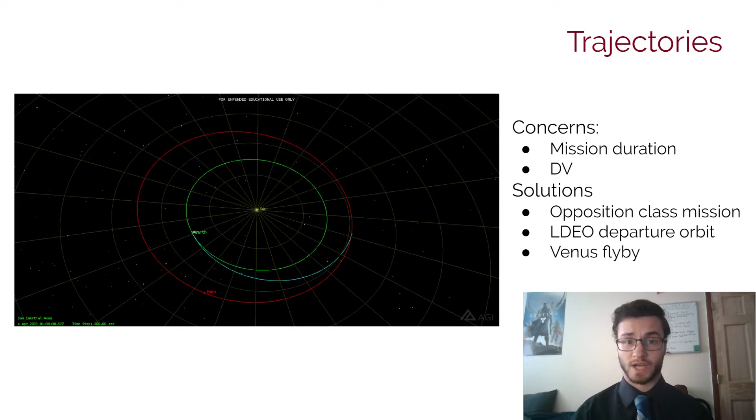A 2033 transfer window was chosen as it holds the lowest energy trajectories to Mars from opportunities in the late 2020s to the mid-2030s. The second lowest energy transfer in this window also holds the lowest time of flight, making it the ideal departure date to satisfy our requirements. An opposition-class mission with this departure trajectory has a total mission duration of about 563 days, a massive improvement upon a conjunction-class mission, which usually has a total mission duration of about 1,000 days. Additionally, a similar opposition trajectory is also possible in 2035, allowing the use of 2035 as a backup launch date in case of schedule slip.

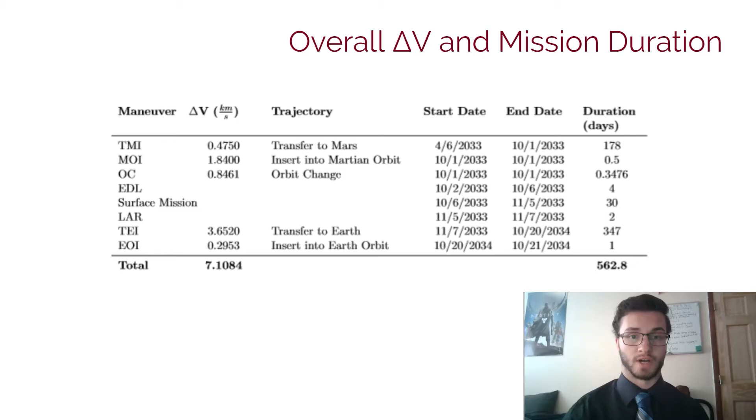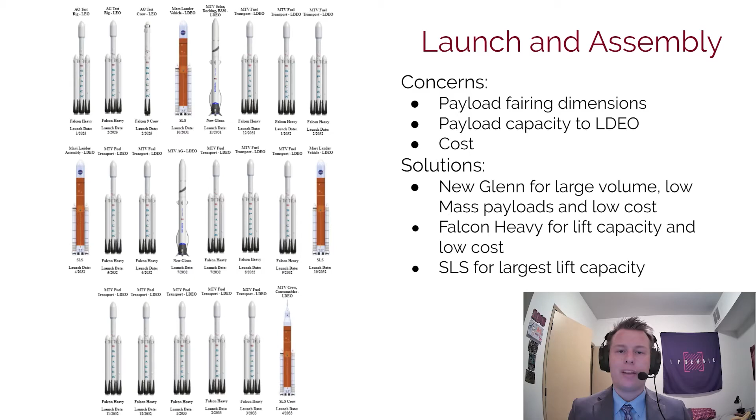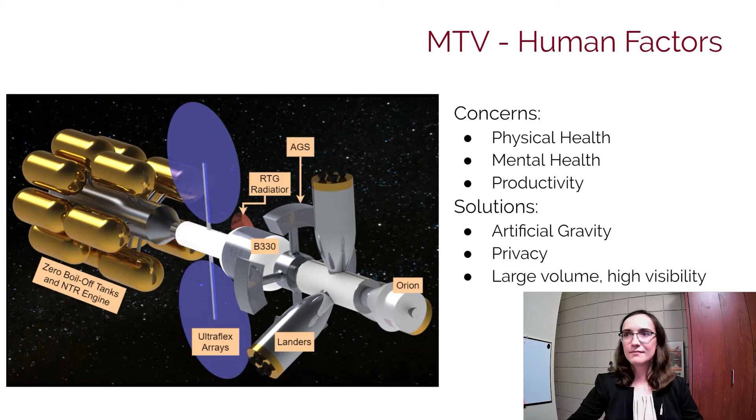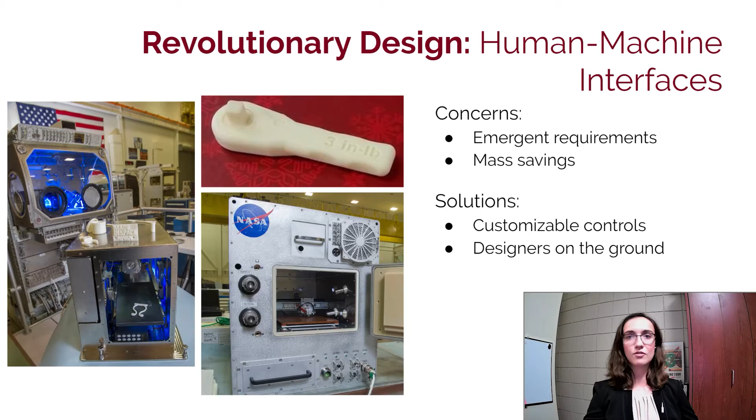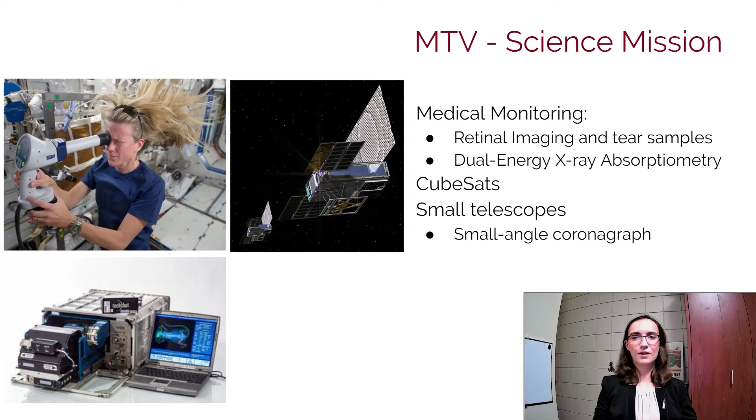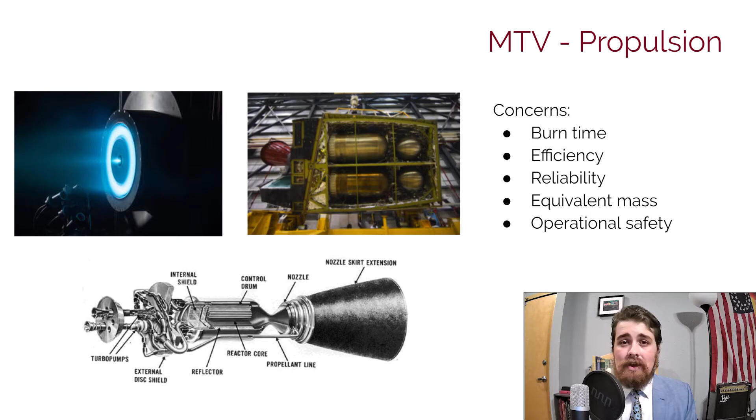In designing a propulsion system for the MTV, a few major factors were considered: burn time for our required maneuvers, engine efficiency and reliability, overall system equivalent mass, and operational safety. Four different configurations were considered: a pure ion electric system, a pure chemical system, a hybrid of chemical systems and ion electric systems, and nuclear thermal propulsion. We chose nuclear thermal propulsion.

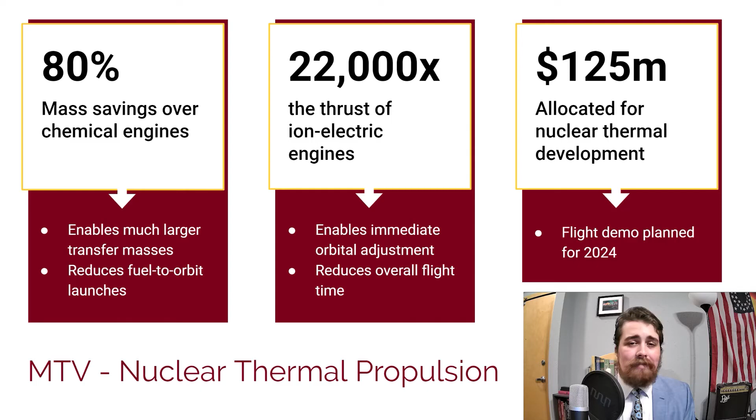Additionally, the new congressional funding and plans for aggressive flight testing by 2024 or soon thereafter gave us a lot of promise that this technology, which has long been touted as a lost wonder of the world, would actually come into fruition in our time. Characteristics for our nuclear thermal engine were pulled from a recent NASA paper, which proposed a NERVA-derived, more flight-adapted design.

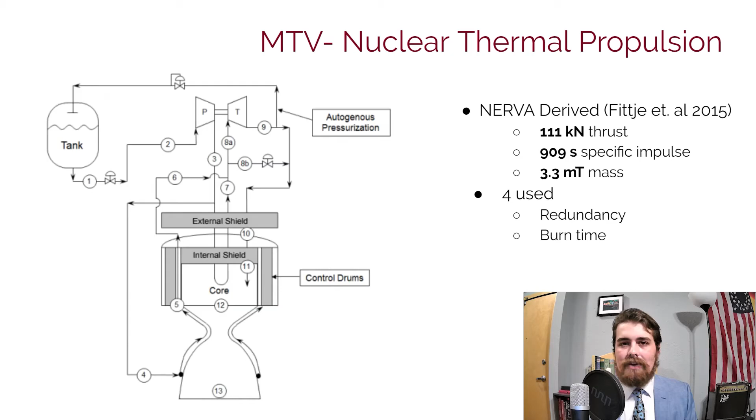It provides 111 kilonewtons of thrust, is rated for 10 hours of burn time, and in our design we chose 4 of these, which would be mounted at the rear of the vehicle for a few reasons. Number 1, just raw redundancy, the more the better. Additionally, the 4 engines allow for a very powerful 444 kilonewtons of thrust, which will allow us to accomplish very quick, short maneuvers, increasing our overall efficiency. And they can also be burned in engine pairs, reducing wear on actuator components and allowing us to extend the overall lifetime of these engines.

NASA Standard 3001 requires that muscular strength and bone mineral density must be maintained above 80% of baseline values. This is a difficult requirement to meet for current ISS astronauts who spend 2.5 hours every day exercising but still exhibit significant deterioration. Reduction in muscular strength, loss of bone mineral density, and increased orthostatic intolerance may lead to difficulty performing their required tasks. Artificial gravity will be necessary to address this risk, but there are still many unknowns.

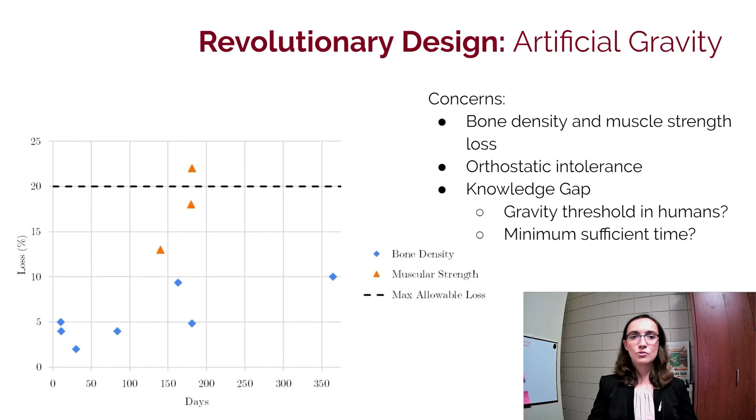There is no data to suggest what level of partial gravity or what duration spent in partial gravity will be sufficient to mitigate deterioration. Rodent studies suggest that there is a minimum efficient gravity level between 0 and 1 g, but this level is unknown. Furthering this research will help define the gravity effectiveness threshold, and longitudinal studies of this crew will provide much needed data. Let's talk about the artificial gravity concept.

We've got a couple of requirements that define this design. We're looking at less than 25% gravity gradient across the body, which means, for example, if there's 1 g at the feet, there has to be at least 0.75 g at the head. We're talking about the astronauts here. We're also looking at fewer than 23 revolutions per minute, and this is a disorientation limit, as above 23 RPM it is challenging for astronauts to adjust to that revolution rate.

So we've designed an artificial gravity concept that has a radius of 7.78 meters, therefore an intermediate radius centrifuge, with 0.4 g at the head of the tallest astronaut at 6 feet 4 inches. This results in an acceleration of 0.533 g at the feet to satisfy the 25% gravity gradient. This centrifuge is spinning at 2.51 revolutions per minute.

Now, a couple of notable things about this design is that it is designed to be an oblate spinner, which means that the axis of the main cylinder is the axis about which this design is symmetric. So we have coined that the IX axis. So the IY and IZ axes of inertia have the same magnitude. This should result in a very small control input to maintain attitude during transit of the MTV.

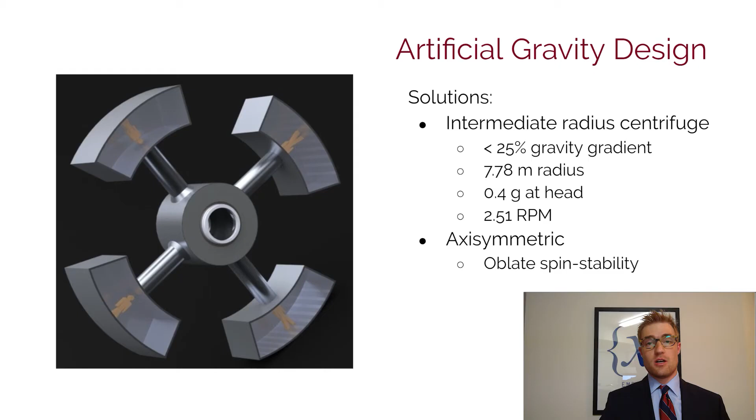The hyperbolic excess velocity at Mars for our ballistic transfer is nearly 4 kilometers per second. In order to minimize the capture delta V, we first insert into a polar, highly eccentric 100 kilometer by 13,000 kilometer orbit. The non-human landers then undock from the MTV and re-enter over 2 orbital periods at periapse.

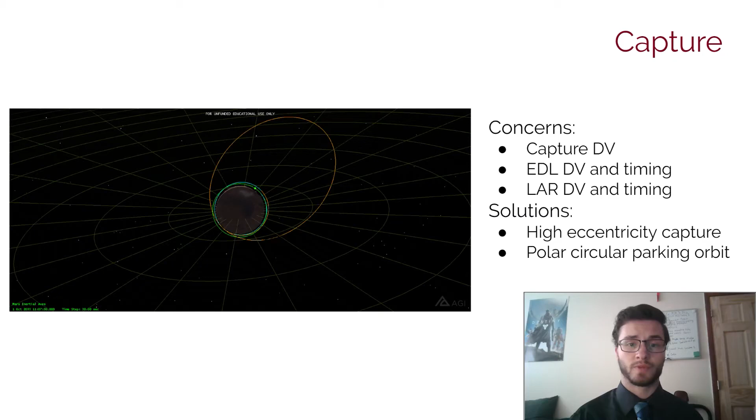The MTV, along with the human lander, uses the drag of the Martian atmosphere, along with 2 burns at periapsis and apoapsis, to shift to a 300 kilometer circular parking orbit. This orbit is more operationally ideal for the mission, as it allows 2 predictable launch, ascent, and rendezvous opportunities per Sol. Finally, the 3rd human lander will undock with the 2 astronauts aboard and descend into position for EDL.

Over the course of 3 days, each lander will descend from a polar orbit to Jezero Crater. The first will be Obsidian, containing the Mars Ascent Vehicle. The second, Onyx, containing our habitat, science equipment, and power infrastructure. And the third, Opal, containing the rover, construction equipment, and the crew itself. These landers will all utilize HIAD technology and subsonic retropropulsion to land within a 15-kilometer landing ellipse on the surface of Mars.

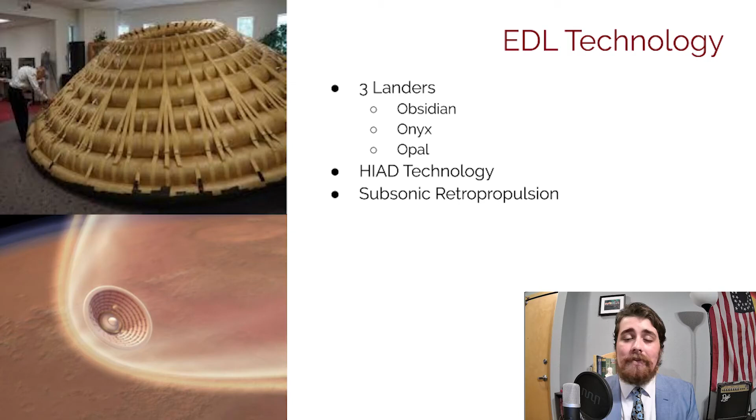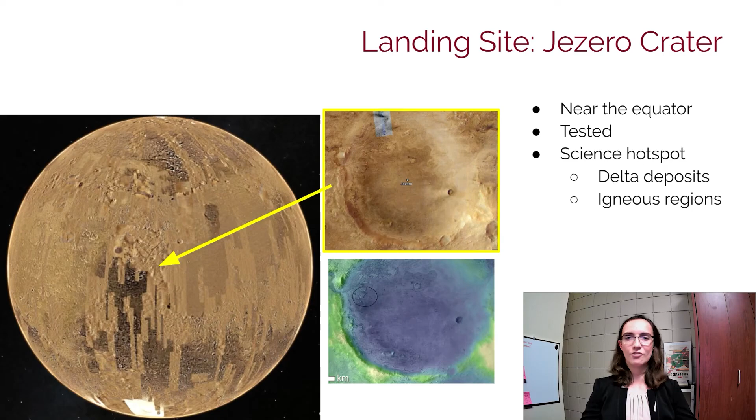Surface operations. Jezero Crater is an ideal landing site because it's near the equator to get adequate sunlight. It will be scouted in advance by Perseverance, and it's a science hotspot. The delta deposits in the northwest region may have preserved organic molecules, making it the perfect spot to search for life. Jezero's igneous regions can also help answer questions about the crater's volcanic and fluvial time histories.

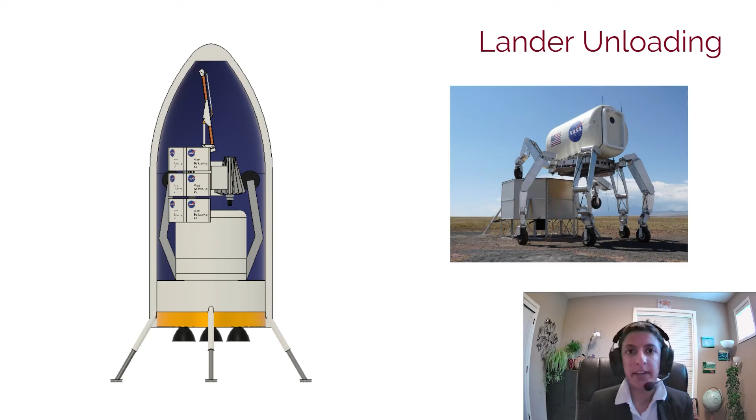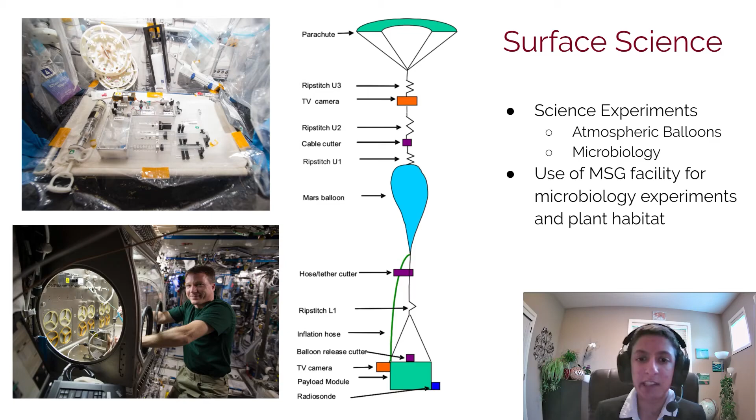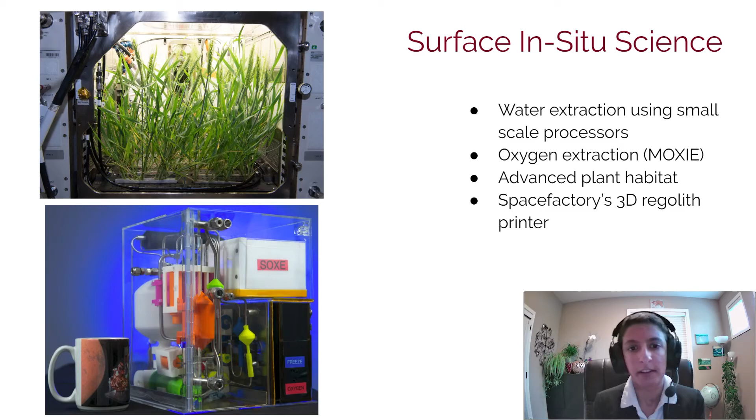Science experiments on the Martian surface will include launching atmospheric balloons to learn more about Martian weather and climate, and microbiology experiments where Earth-born microorganisms and a microgravity glove box will be assessed for how they react to the Martian environment. In situ science experiments will include water extraction from the Martian atmosphere, oxygen acquisition based on the MOXIE program on the Perseverance rover, an advanced plant habitat that will provide a small food source and biomass production, and 3D printing using Martian regolith.

Sample collection will include short-term samples, which will be mainly used to determine whether a sampling site is of scientific interest, and then where to sample next. Long-term sample acquisition will focus on total diversity and total mass of samples. All long-term samples that head back to Earth will be sterilized before they leave the Martian surface, so all analysis on non-sterile samples will be done in the Shed Lab on Mars.

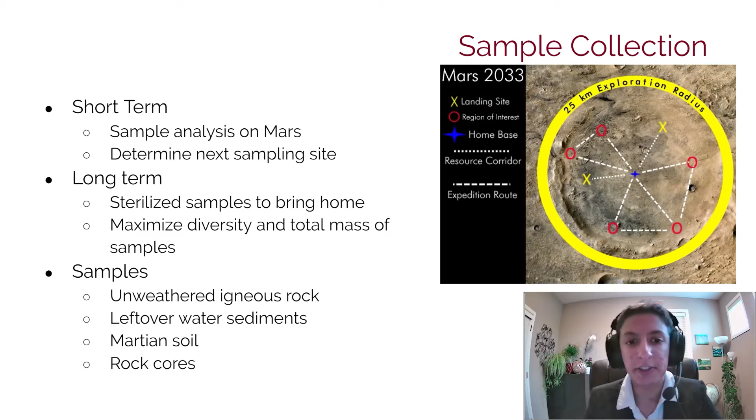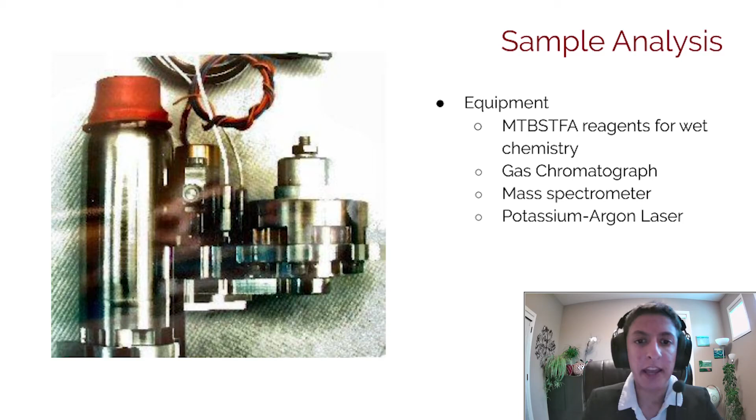Derived from NASA's current science mission priorities, Project Sisyphus will engage in 3 major areas of study. Number 1, the search for life. Number 2, characterizing the Martian environment. Number 3, demonstrating ISRU technologies. In order to maximize the value of time on the surface, sample collection will be divided towards 2 main priorities: in situ science, which will allow us to look at unsterilized samples and inform collection efforts while still on the surface, and at-home science, which will allow us to further overall scientific understanding and plan for future missions.

In designing a habitat for the Martian surface, several different factors were considered, primarily stowed volume, ease of deployment, and habitability of the actual space. In order to overcome these issues, we developed the Buildable Nested Deployable Temporary Habitat, or BuNDTHab for short. The BuNDTHab is an inflatable habitat derived from Bigelow Aerospace's inflatable technologies. It features a semi-toroidal outer body wrapped around a central hard core, which contains all of our hardware, equipment, and hard points. It features a hybrid suit port dock to reduce contaminants potentially leaking into the habitable space,

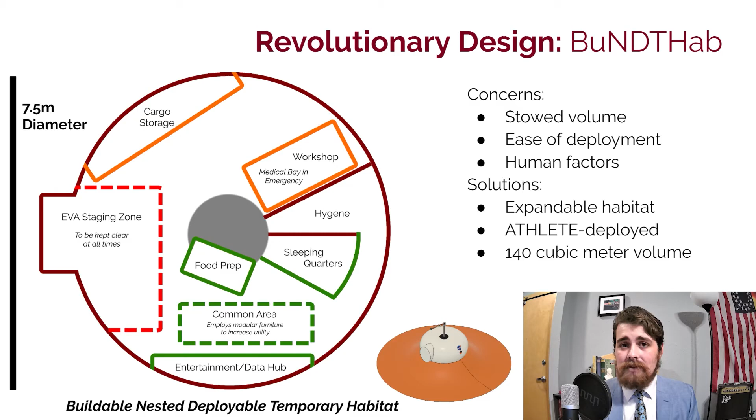and it is deployed off the lander using an ATHLETE-derived rover. This ATHLETE rover will step off of the lander, seat itself in an area that's been carved out by the bucket of the off-Earth tracked rover, and then be buried by the rover, providing a rigid, stiff, strong support base for the habitat once it's actually on the surface.

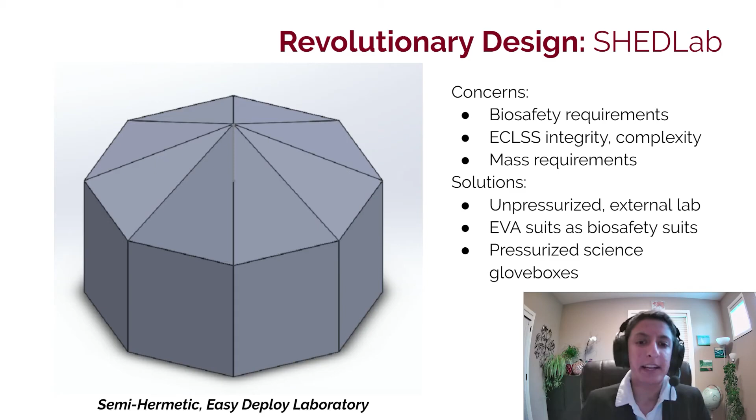The Shed Lab was mainly designed out of biosafety requirements. It acts as a separate module from the BuNDTHab and is an unpressurized area protected from the Martian environment to perform experiments. Astronauts will wear their EVA suits inside the lab, with the suits acting as biosafety suits. Experiments that include biological material from Earth, like the microbiology experiments in the plant habitat, will be conducted in pressurized science glove boxes. Let's talk about the Off-Earth Tracked Rover, or OTTR for short.

This is Project Sisyphus's design submission to fulfill the requirement that the astronauts need a pressurized rover on the surface of Mars to aid in the search for life. It comes equipped with a number of tools to do so, in addition to helping assemble the BuNDTHab and the SHEDLab, moving radioisotope thermoelectric generators, and collecting samples.

We were seeking a very robust design for this OTTR to cut down on the amount of maintenance that the astronauts were required to perform, and so we chose a tracked drive train. This was seen as very durable and resistant to failure on the terrain types that we were expecting. Additionally, we were shooting for a 30-mile-an-hour top speed, which is about 13.4 meters per second. We saw this as a good balance of both safety and speed when traveling around Jezero Crater.

A tracked rover design is unique to the Sisyphus mission. Tracks were selected over traditional wheels for their remarkably high traction, considerable maneuverability, and robustness to terrain. The OTTR is inspired by vehicles like PowerTrax's PT-8 snowplow and the Army's multi-purpose vehicle, which have a high payload capacity and can drive off-road in rugged conditions. Tracks distribute the maximum load over a greater area than wheels, allowing the OTTR to carry more than 11 tons reliably over the surface of Mars.

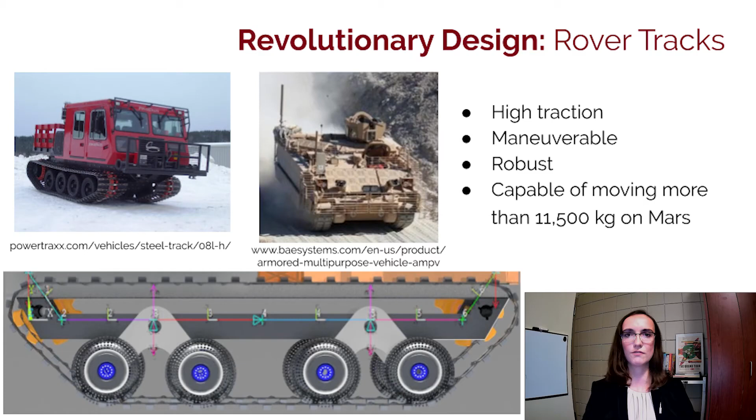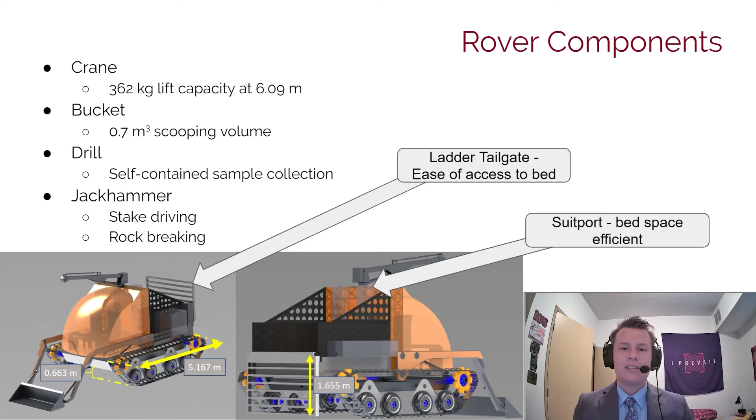To increase the usability of the rover, several attachments will be used. A crane will be used to move large equipment in and out of the bed. A bucket will be used for the clearing and transportation of regolith. A drill will be used for scientific purposes, and a hammer will be used to drive in stakes for the habitat as well as to break up regolith. A ladder will provide easy access to the bed for the astronauts, and suit ports will be located in the bed.

The primary concerns for design of the surface power architecture include total mission energy, peak power demands, surface power mass, solar panel efficiency, and operation in the case of unit failure. To meet peak power and mission energy requirements, 10 kilowatt radioisotope thermoelectric generators called kilopower units are employed. These RTGs achieve their high power output through the use of high efficiency Stirling engines and can deliver more power per kilogram to the surface than a large 40 kilowatt fission power unit.

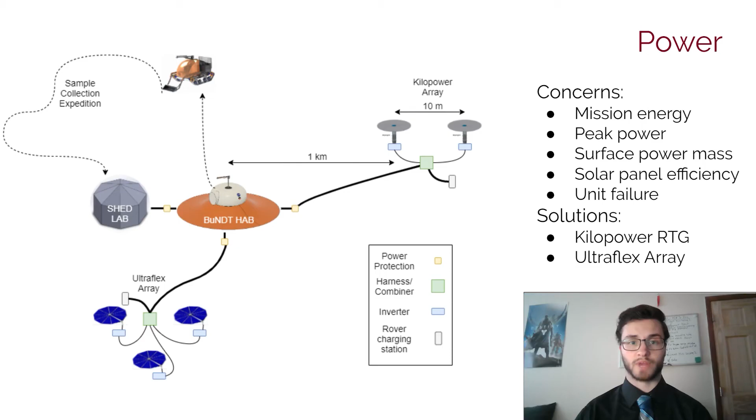To further reduce mass, 7 kilowatt UltraFlex solar arrays built by Northrop Grumman are used to supplement the number of RTGs needed on the surface. It was found that a combination of 2 kilopower units and 3 UltraFlex arrays were able to meet both mission energy and peak power requirements. To ensure reliability, the same VAC cables and power inverters are used for both the UltraFlex arrays and kilopower units, since they're in roughly the same power range.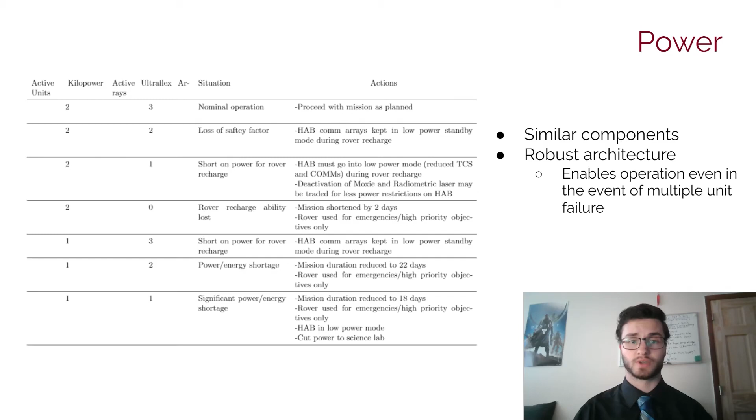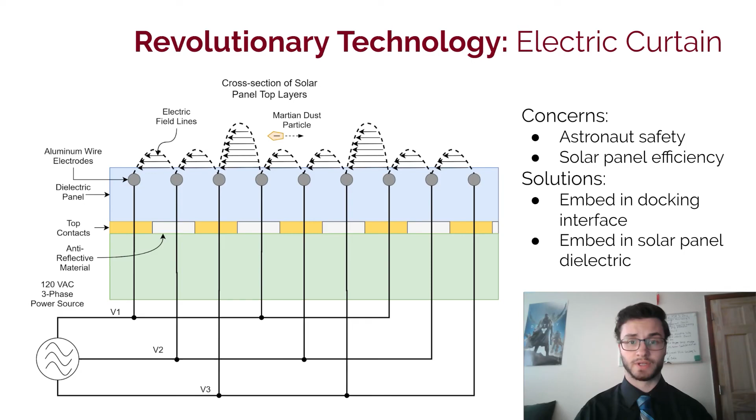One concern not addressed in the previous power slides is how the efficiency of the UltraFlex solar arrays will be maintained in the presence of charged dust particles. These charged dust particles also pose a threat to astronauts as they contain perchlorates and can stick to their suits, making their way into the habitat through the docking interface. To solve this, Project Sisyphus employs the use of an electric curtain. This device uses wire electrodes along with a multi-phase voltage source to levitate dust particles off of surfaces and carry them away with a traveling electric force wave. The device uses simple components, requires relatively low automation, and the electrodes can be easily planted in any dielectric.

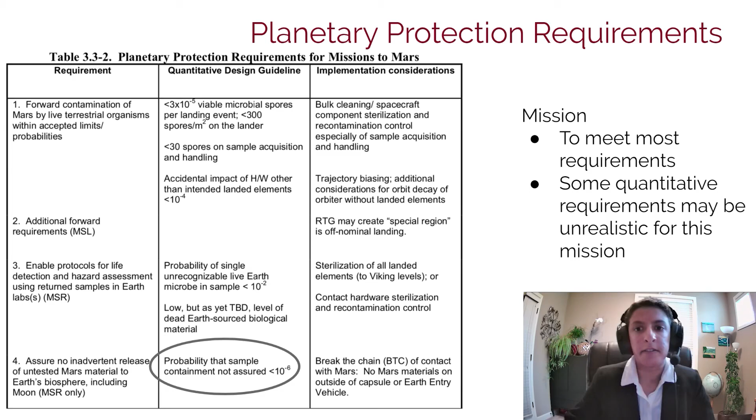Our planetary protection plan is split into two categories: forward and backward contamination prevention. Forward contamination prevention starts with biobarriers being installed on the exterior surfaces of the MTV and landers. HEPA filters will also be installed in the pressurized habitat to prevent contaminated air leakage. Before launch from Earth, the MTV and landers will be sterilized via dry heat microbial reduction.

As an added precaution, vapor hydrogen peroxide will be used to sterilize the inside of the habitat before astronauts leave the Martian surface to ensure that air leakage won't contain Earth contaminants when they leave. Backward contamination prevention starts with containing Martian samples with in situ containers for analysis in the shed lab. Before ascent from Mars, all samples will be sterilized and contained via brazing.

The ascent vehicle which contains the samples will likely be free of Martian biological contaminants due to solar wind and microgravity. Finally, an Earth entry vehicle will be used to capture the ascent vehicle before it enters Earth's biosphere, ensuring we break the chain of contact with Martian material.

The main goal of the ascent vehicle was to limit system complexity while safely getting the astronauts to the Martian transfer vehicle. To limit system complexity, all of the ascent vehicle will fit within a single lander. This means that the fuel and structural mass must be below 22 tons. To limit fuel mass, a single vacuum-optimized Raptor engine in a single stage-to-orbit configuration will be used, giving a fuel mass of about 18 tons.

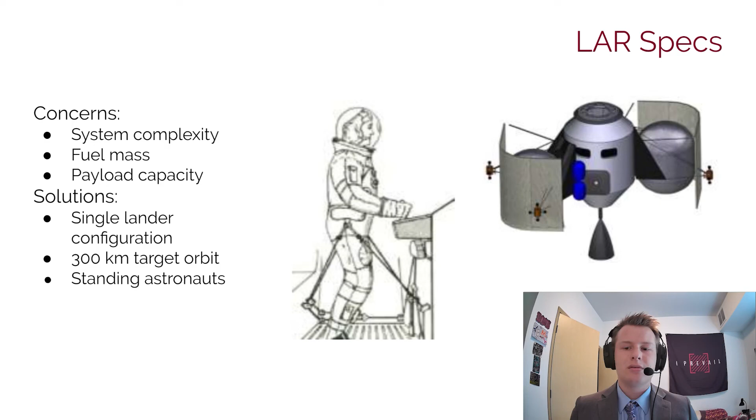Because science is of great importance to this mission, the structural mass was also limited. To do this, the astronauts will stand during ascent, much like the Apollo missions. This allows for sample return of about 600 kilograms. Validation of the MAV's ability to reach the MTV's 300-kilometer parking orbit was undertaken by applying first principles to obtain an overestimate of the fuel mass necessary to reach this orbit. These results were confirmed using a launch segment simulation in Astrogator.

The conservative estimate was made using a modified version of the Tsiolkovsky rocket equation that included a term for constant gravity. It was determined that assuming alignment of the gravity vector in the opposite direction of the thrust vector for the entirety of the burn time would yield an overestimate of the fuel mass required.

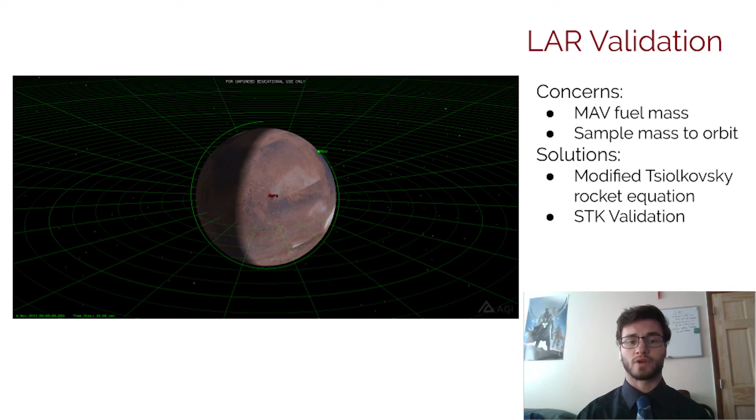The results of this calculation showed that our initial estimate of 18,000 kilograms of fuel mass was roughly 1,500 kilograms more fuel than was needed to reach the desired orbit, for a sample payload of 600 kilograms. Instead of increasing the sample payload, it was determined to keep the safety factor on fuel mass, ensuring that plenty of fuel would be available for orbit phasing and additional rendezvous maneuvers.

Budget and risk. The first step in estimating the cost of Project Sisyphus was to compute the NASA budget from 2021 to 2035. This was done using the 2020 Explore budget estimates and was found to be about $84 billion. The Apollo missions were then used as a relevant historical analog and adjusted for work efficiency increases and inflation and calculated to be about $165 billion if done today.

Both the development and deployment costs were then estimated using historical analogs, cost estimating relationships, and current prices. The development cost was calculated to be about $94.3 billion, and the deployment cost was calculated to be about $22.7 billion. Summed up, this is about $117 billion for the mission. This number is higher than the NASA budget available, but lower than the Apollo budget, and was thus deemed reasonable.

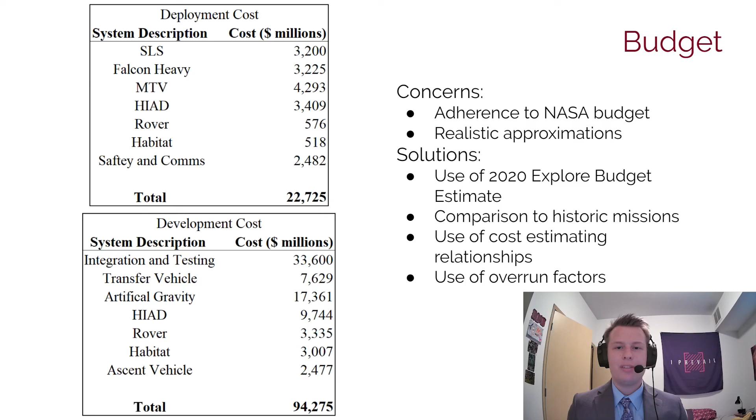The highest driver in this budget is the integration and testing, which is necessary as this is a human mission and was calculated to be about $33.6 billion. After calculating the mission costs, it was important to break down development and deployment into a yearly budget. This was done using an optimal project budget schedule and is shown. It is important to note that several years have a cost that is equal to approximately half of NASA's yearly budget.

Failure mode and effects analysis shows the greatest mission risks will be forward and backward contamination, irreparable damage to the Otter, and crew injury due to deterioration. These highest priority risks have high severity, high probability of occurrence, and low likelihood of detection. There will always be risks associated with human spaceflight. The risks associated with the Sisyphus mission are acceptable. The risk of forward contamination is extreme, but unavoidable if humans are to ever have a sustained presence on Mars.

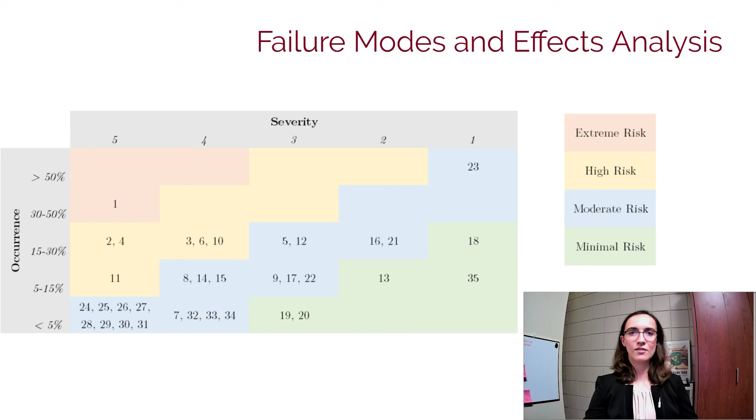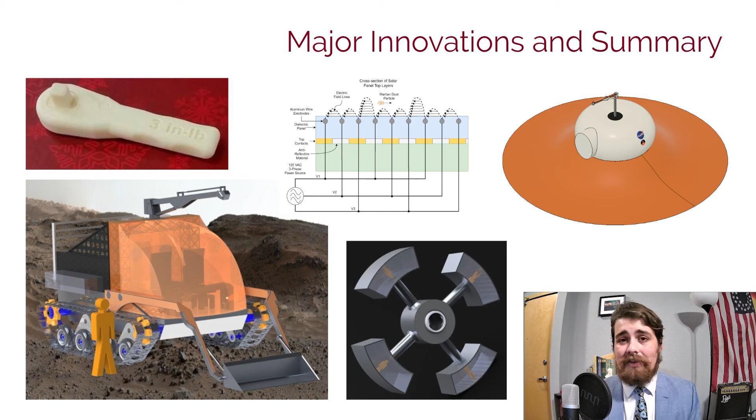Conclusion. Project Sisyphus is a fundamentally different Mars mission. Leveraging the low-cost orbit capability of our commercial partners, Project Sisyphus will overcome the technical hurdles in its way. Through the use of rugged, capable equipment like the Otter, the Bundt Hab, and the artificial gravity system, natural barriers to exploration will be passed by. Through the use of equipment like the Electric Curtain and the Shed Lab, our planet will be protected while we explore others. This will happen in our time. Let's do it.